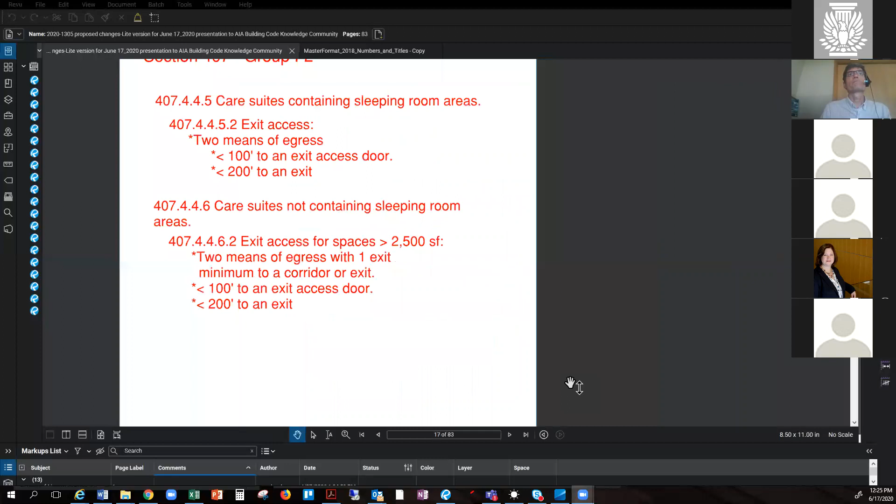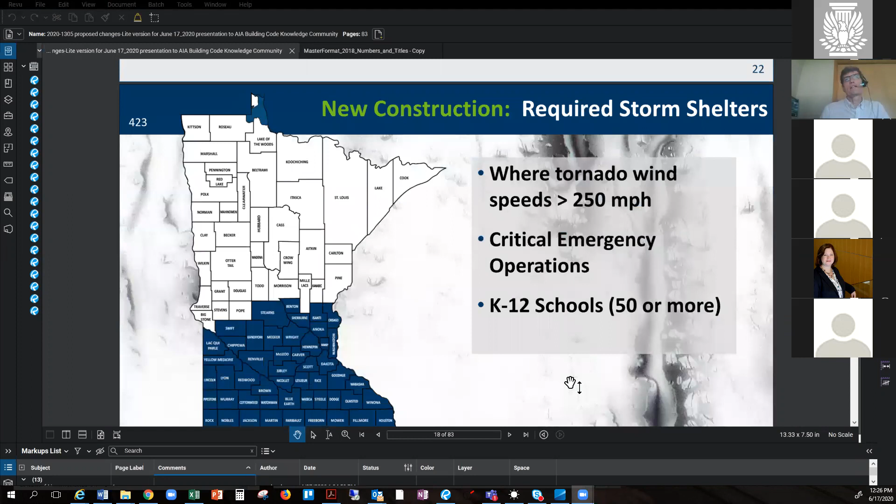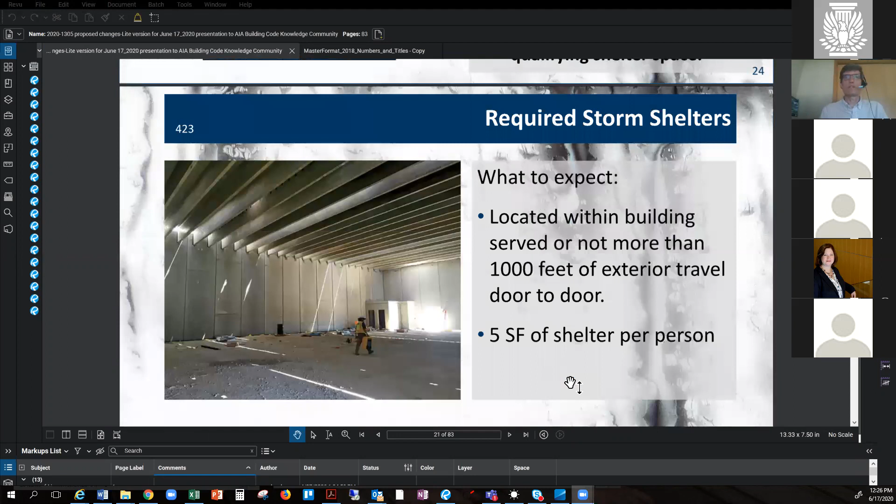It shows a map, but the good thing is that Greg and his group thought that it would be probably more pertinent that we list the counties. So that is in fact what you find within the Minnesota version of the IBC, specifically listing every single county rather than just relying on a map. So you'll find that criteria within 423.

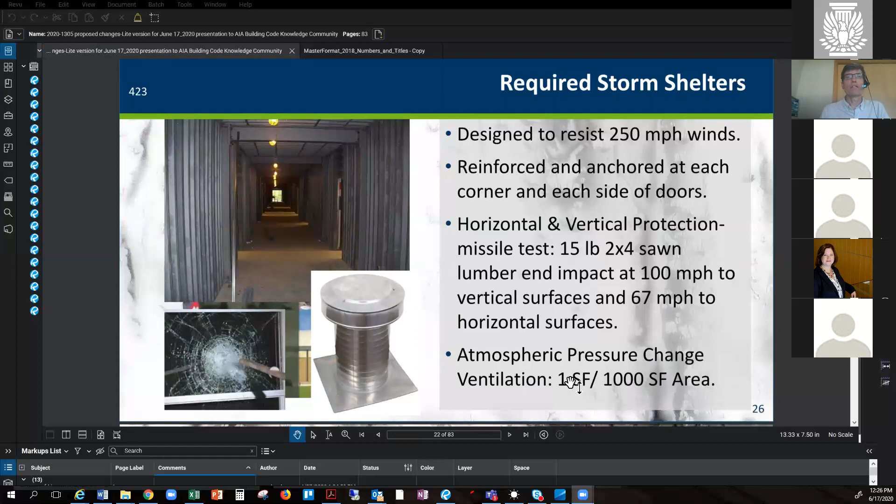We'll talk about the items that are the criteria and the items and the elements and the assemblies that are required, and what the performances are or prescriptive measures need to be to satisfy these kind of spaces. So know that you've got that to look at.

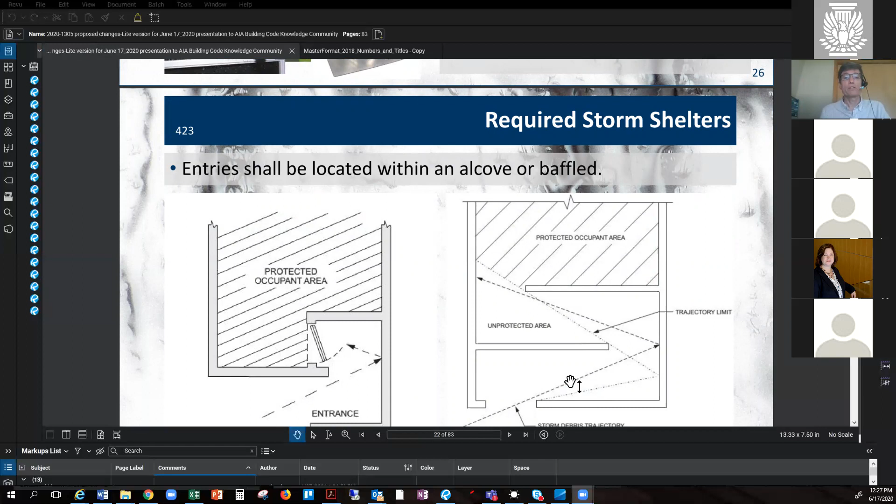And she's showing some provisions on how one perceives these spaces, how to do it in a graphic sense here, but obviously it's important to make sure you have a safe space from all things that are involved in a high winds incident such as this.

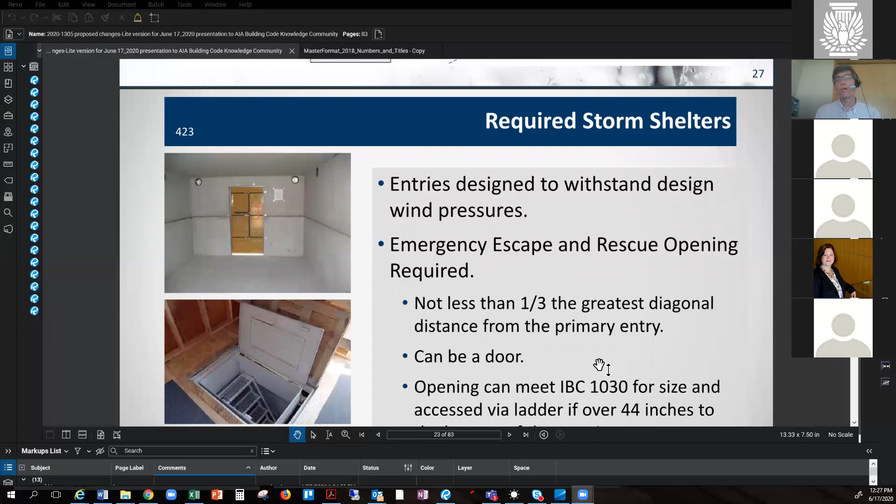So it's really just reiterating the things that are within the chapter within 423. But because this is a new provision that hadn't been addressed so specifically in the past, wanted to make sure that folks were understanding that it existed, and then what is it going to take, or when are you going to be needing to address them.

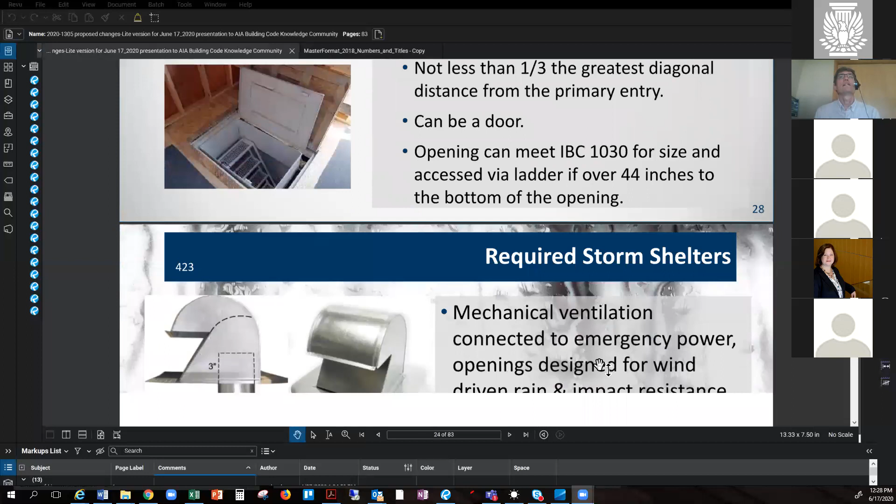So it talks about the ladders, talks about the distances, mechanical ventilation, obviously going to be a big part of it too, and even toilet facilities. So these are all obviously things that need to be kept into play. I just added this as a reminder.

A school, in this case, he's talking about existing schools. Certainly take a look at this at your leisure to see what those scenarios are. I won't belabor it or get into too much detail of it.

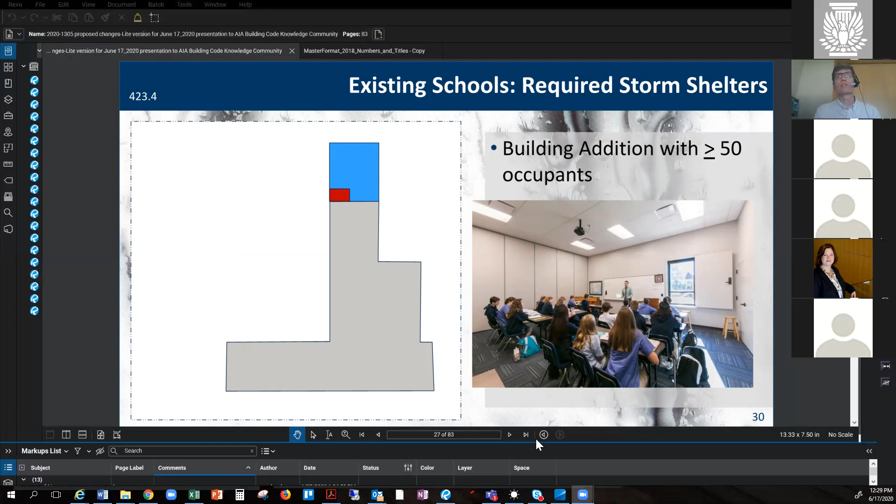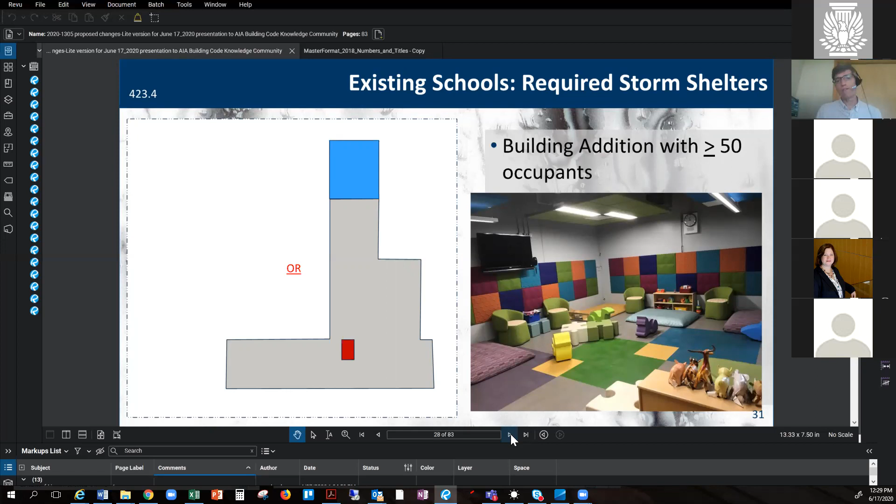And he's giving some examples of where one might be able to find, but it's all based on these thresholds. So if the building addition has got greater than 50 occupants, then you might find yourself looking at providing some sort of a safe haven shelter within the existing structure.

And then portables. What is involved if you're dealing with a portable condition, which we certainly have seen for those of us who are in, or in my case, used to be within the school market. That is something that you're going to have to take a look at.

And it's all about the counts then too. If those counts are involved, where do you put it? How do you handle it? In another scenario again, portable classrooms, and what one needs to address to meet this provision for a storm shelter.

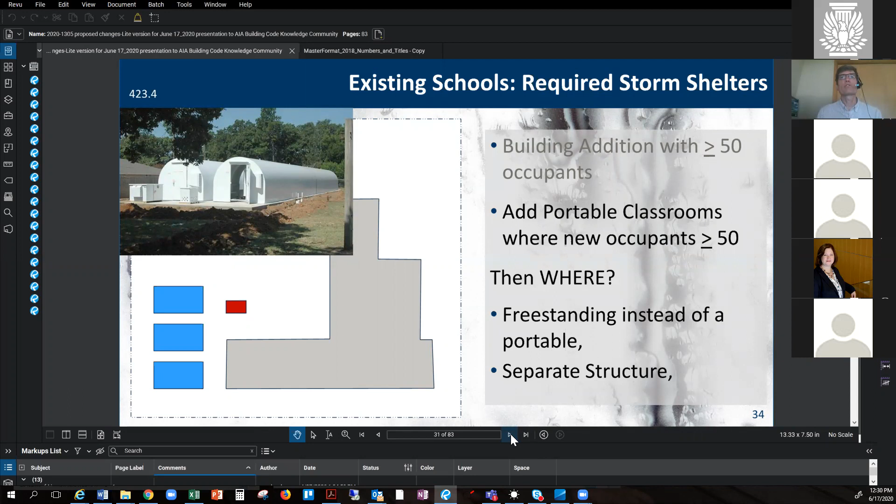Talking more about really the same thing, locations, criteria.

So the one thing that I had spent time on within the last few days, Greg and I were chatting about the session I was going to present today, and I'd asked him if there was anything within what I was going to show from his session, since that was still proposed at the time. And he brought up the firewalls. Now, the one takeaway I want you to understand with this, and this is why I put it in, it's a very minute change in the description. You can see the previous language.

With whatever you're dealing with now, everything behind that firewall is what it is, and that's how it goes. The IBC or the ICC came up with a clarification to what a firewall is intending to be. Basically what they're saying is it's for the purpose of determining area limitations, height limitations, and type of construction. Meaning, if that's how you're building a firewall, then you're good. But if you're building a firewall because there was no sprinkling behind that wall or in that building, and now you're adding a firewall to separate a sprinklered versus non-sprinklered space, Doug Thornburg from the ICC clarified for me last week that that's what's going away.

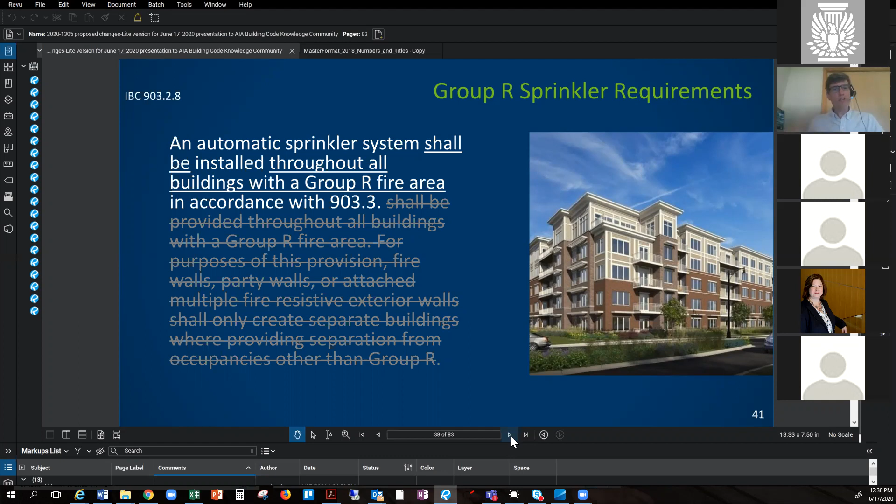Just to give everyone an understanding of the process, when we do the tag committees, we're going through every line item and spending the time we need to talk about what's pertinent, what isn't. Some of these things actually are not tabled, but there's other conversations happening as far as does this relate to the fire code, does this have any other mechanical aspects of the energy code. So those tag committees are then meeting again, the chairs meet and look at the nuances and anything that's conflicting, and try to put some sort of a general understanding for consistency's sake, so that all the codes are not basically canceling each other out or providing conflict. So there's other meetings happening even after our tag committees took place that talk about what needs to be done to make sure there is no conflict within the various chapters.

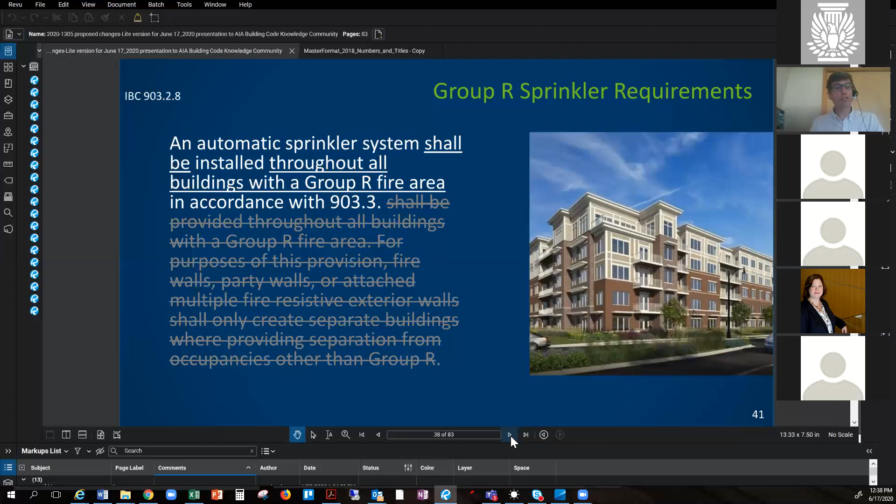This gets back to what I've already talked about, but it's a very important item. Talking to Doug Thornburg, for those who don't know, Doug does a lot of code seminars for the ICC. He comes here at least once, if not twice a year, to either the Building Officials of Minnesota organization or through the U of M. In those talks, he mentioned this criteria to me as basically, too many people, or not too many people, but numerous areas of the country were using it for anything. This is really just honing in and saying, this is what you can use it for and nothing else.

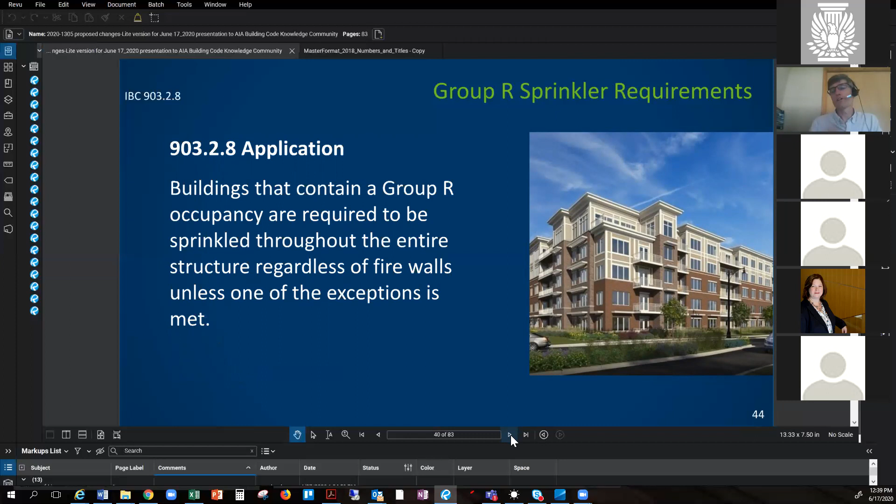Okay, so there's some exceptions involved with the sprinkling provision, and it's talking about that. So just know this, take a look at 903.2.8, if you're in this market and you're working within this building type.

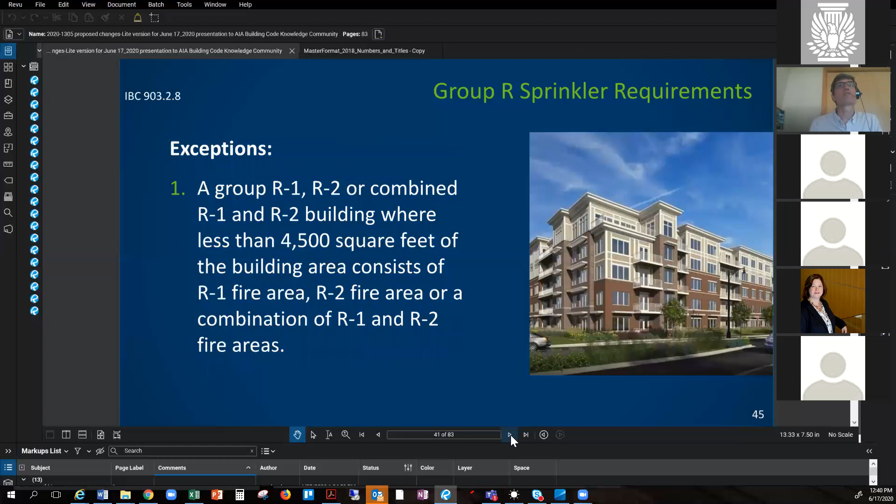Voice alarms, there are some nuances that were put into the code to address some of these things, and Greg just wanted folks to know what those were. It's prescriptive, so work within that, working with your likely electrical or technology group, be sure that they are on board with the criteria that's here.

And carbon monoxide detection, there's some ramping up that happened with that, and especially with the CO, the carbon monoxide, there's certain very specific criteria that we want to be able to be aware of.

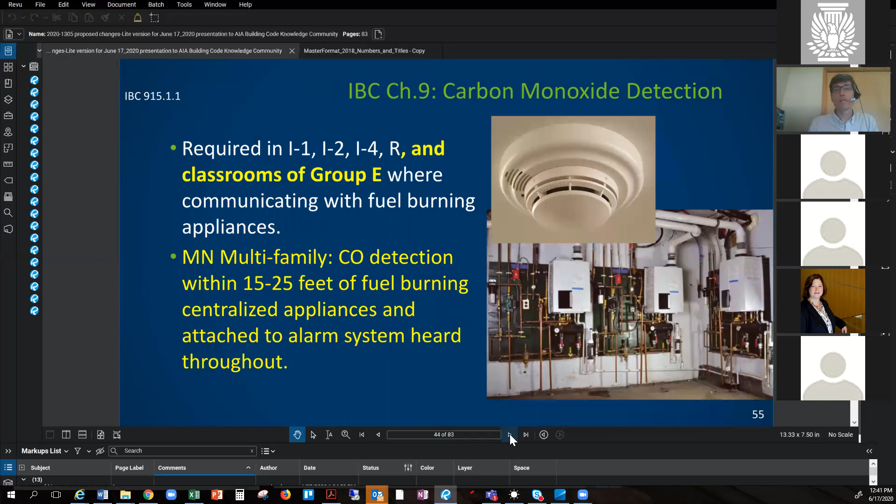Okay, so number of exits and exit doorways. I'm gonna just do a quick view here about if anyone has... I've seen some chats coming up, but they don't stay on my screen. I'll come back to that. Bear with me, and I'll just keep going through this, and then I'll circle back.

Okay, so some of you have known about this thing with the boiler rooms and having the exits. There's nothing terribly unique about having two exits, 1/3 the length of the maximum overall diagonal. Usually that goes within a sprinkled space. There's something obviously that Greg wanted to get the group aware of, and some of this is common sense. The one thing about mechanical rooms is, though, and he does talk about this here, is that second exit does not necessarily have to go through a door. You could find another path for it, but it's specific for mechanical rooms.

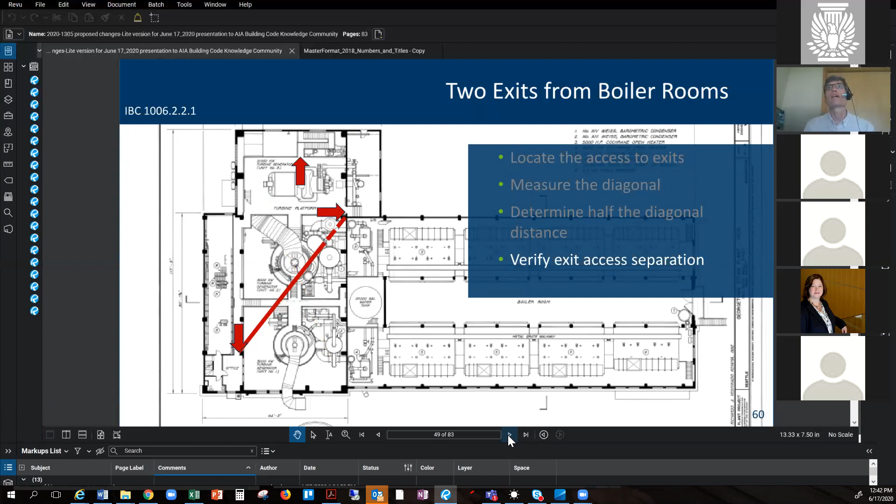So he gives some examples here of how one approaches determining the exits within that space. Obviously he's got his bullet points: locate the access to exits, measure the diagonal, determine half the diagonal, verify exit access separation. Those are the things that are part of that process.

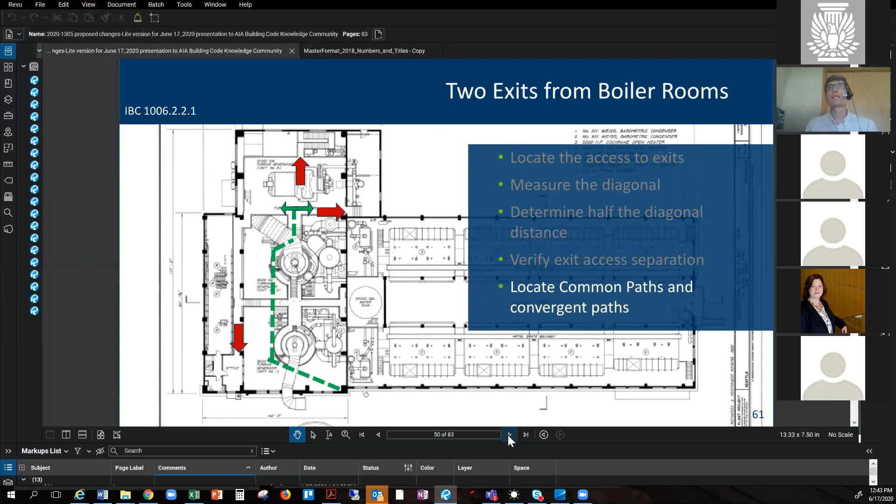And then your common paths and convergent paths. Obviously, you understand that if you have two exits that require a common path of travel, it's not like they can get out of the room and then they converge. That would not be considered two exits. They need to diverge, and you have to find your path and how those all get played out. This is obviously talking about the same thing, but specifically for a boiler room, and because of the sprinkling provision, he's allowing for the 1/3 diagonal and certainly the paths that go within that. And then making sure you don't have convergent paths.

So this is a solution working with, for those who've worked within basement boiler rooms where you really have a hard time getting that second exit to occur. You do have an option here that you could use something like a ladder to be able to exit the space. Just making you aware of that in 1006.2.2.1.

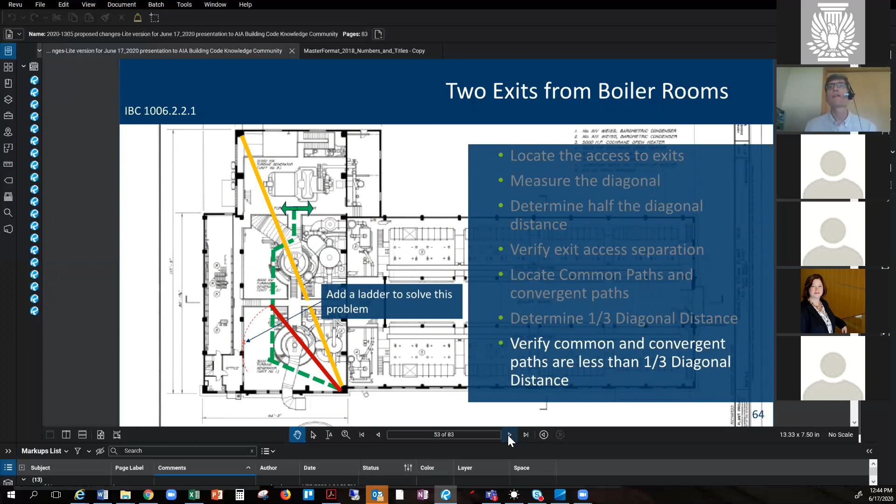And specific exiting from vocational and science labs with hazmat. So we're getting into the occupancy, specifically K through 12, but then there are things involved such as hazardous materials and the size of the room for the labs and how one addresses the exiting from these spaces.

Okay, so exit access is really getting into the same concept of common path of travel and exit access travel distance. Make sure you understand that they come from the same point, and obviously common path stops after the space, where the exit travel distance is measured all the way to an exit, whatever that designation may be.

So then some exceptions. You wanted to be aware of that. And there are some nuances here.

I think from this one here, it's really understanding what your sprinkler provision is, whether it's an NFPA 13 or 13R. And specifically talking about the charts and the footnotes. Be aware that the footnotes are just as important as anything else, because they sometimes give you specific requirements, or they give you some exceptions. So be aware of that.

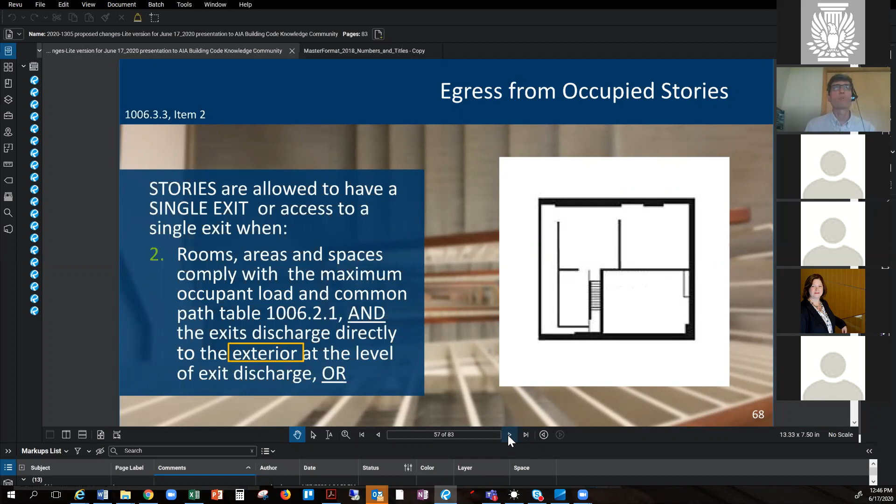And there are exceptions for a single exit, but you can go to the chart. There should be specifically some items listed in the table that give you the parameters depending on what the occupancy group is and what level you're on. So there's nuances to that.

And here he's talking again, continuing to talk about the exiting, the specifics about the discharge directly to the exterior, access outside the discharge, and having 2 approved independent exits. Won't get into the detailing of this, but there are some nuances, and just be aware that it addresses that in 1006.3.3.

So the one thing that the code has also done is to clarify our interior exit stairwells. Because if you think about them, they are a higher level of protection. And frankly, your common path of travel, your exit access travel distance can end at one of these enclosures, but only because they're higher level—1 hour up to 3 stories, or 4 stories or more, 2-hour construction.

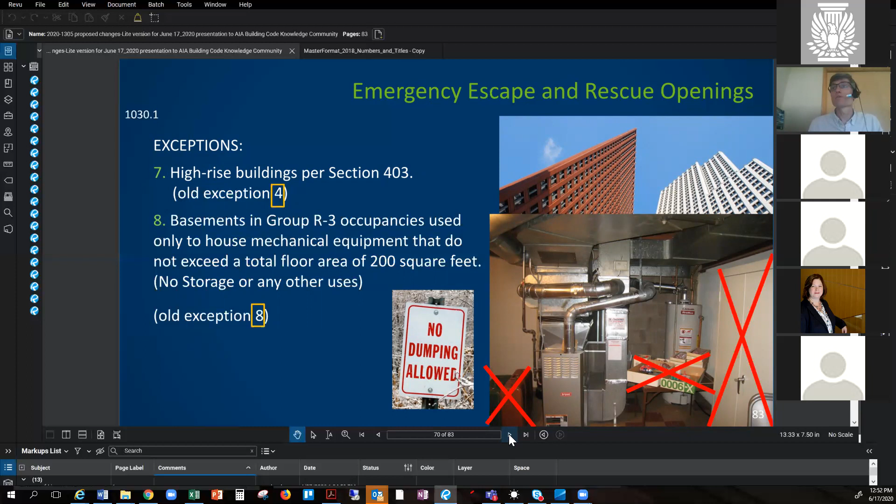And then high-rise buildings, I think these are again exceptions that have been moved around. Take a look, get familiar with 1030, since there are obviously a few things that have changed, whether by Minnesota amendment or prior to, from the 2015, which of course we didn't adopt. Be aware that those are there and they need to be thought through.

Okay, and then there were some repeals. Let's see, just take a look at it. Again, it's not my area of common use, so I'm not as familiar with some of these things, but obviously there are changes that have occurred, and you need to be aware of them.

So we did talk about this a little bit too. The thing with window replacement is because we have this window fall protection. So there was a whole litany of conversations that happened with various manufacturers. We have a few in our area, in the state, who chimed in, and we welcome their input, because it's one thing to make something in the code, but then to make sure that the manufacturers are on board with you. So what comes first?

So we wanted to make sure that there were provisions that allowed for escape, but then you still have to work with the fire department and make it so that it's possible that you can get access into as well as egress out, and also fall protection. You want to make sure you have the right kind of hardware and applications within your windows so that you can accommodate the code.

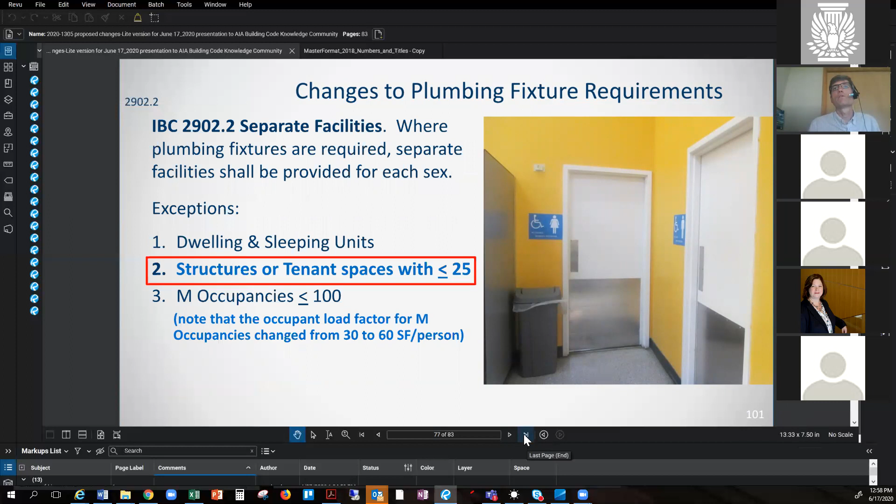Okay. All right, so I think we're getting, let's see.